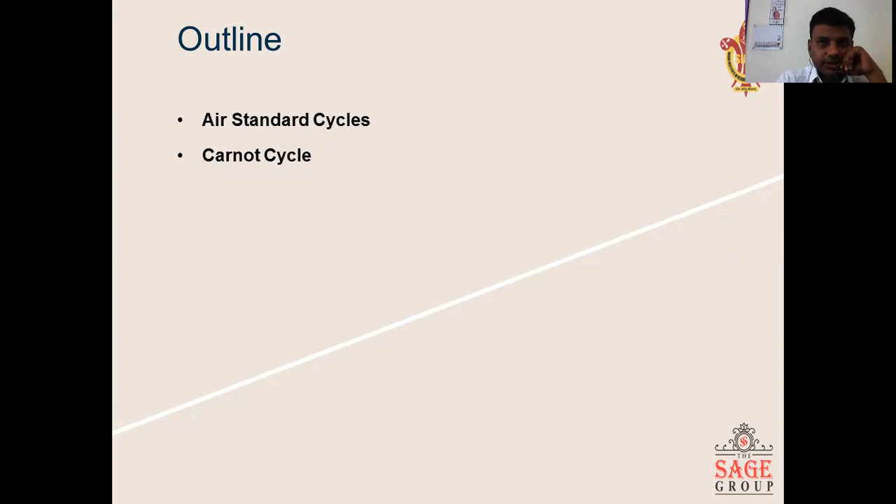So in today's class, we will study about air standard cycle. What are the various assumptions that have been taken while studying air standard cycle? Then we will study one of the most important air standard cycles, that is Carnot cycle. Okay. So let's first start with air standard cycle.

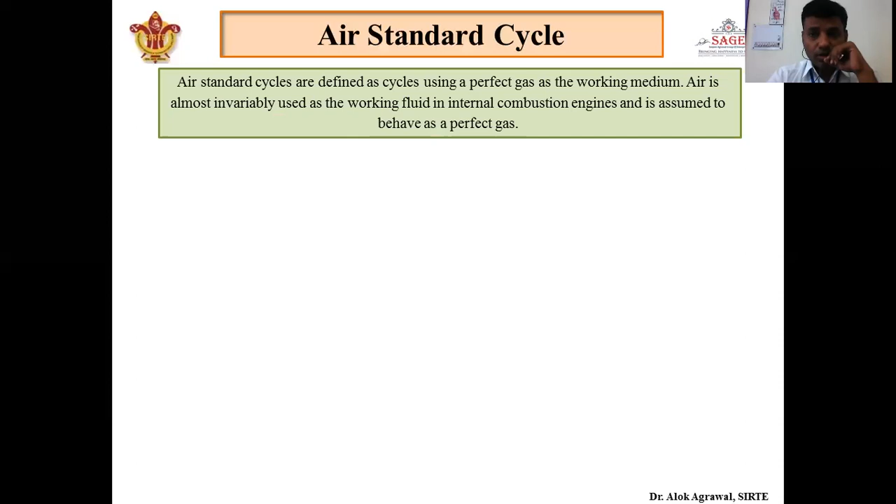So what is called air standard cycle? Air standard cycle is defined as a cycle which can use a perfect gas as a working medium. Okay. So अगर हम perfect gas को our working medium consider कर रहे हैं, then we call it as an air standard cycle. Air is almost invariably used as working fluid in internal combustion engines, because for burning of fuel oxygen is required, and oxygen is present in the air. So we consider that air is a perfect gas, and when we consider air as our working medium, we call it an air standard cycle.

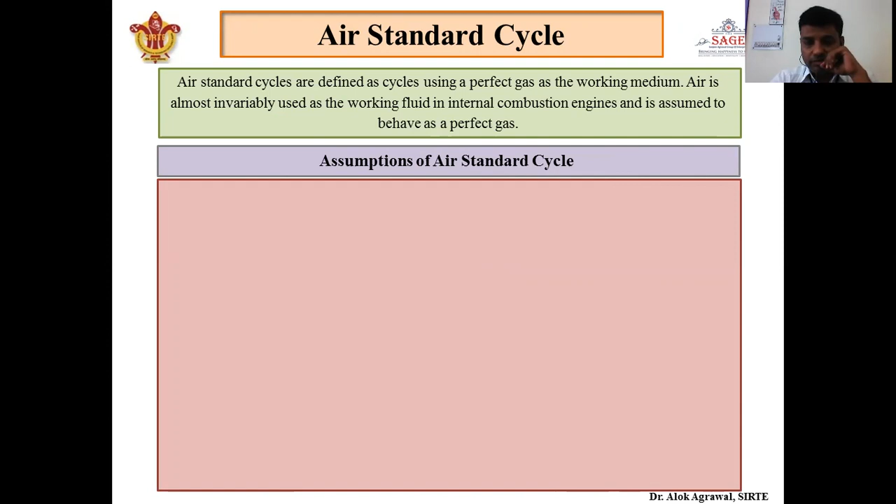Next, apart from that, there are various assumptions that have been taken in air standard cycle. So I am telling about the various assumptions taken. The first, which we have already studied, is that the working medium is assumed to be a perfect gas, and we consider air as our perfect gas, and any perfect gas follows the rule PV = mRT. So this is the first assumption, that the gas has to be a perfect gas and follows the relation PV = mRT.

Next, there is no change of mass of working fluid throughout the process. Means whatever amount of mass is coming inside the system, it will remain constant, and there is no loss of mass due to leakage or anything else. That is assumed, but actually it is not there.

Again, all the processes that constitute a cycle are reversible. Means every process that is occurring in that cycle, we assume to be reversible. None of them can be irreversible. This is the assumption, as we already studied in our thermodynamics, that no cycle is reversible. All cycles are irreversible. All processes are irreversible. Okay. So here we consider that all the processes are reversible.

Next assumption is that working medium has constant specific heat, but in actual, it is not true. Specific heat of gas always increases with temperature. So when fuel burns, temperature increases, and so does the specific heat. But ideally, we have to take the assumption here that there is a constant specific heat of working medium.

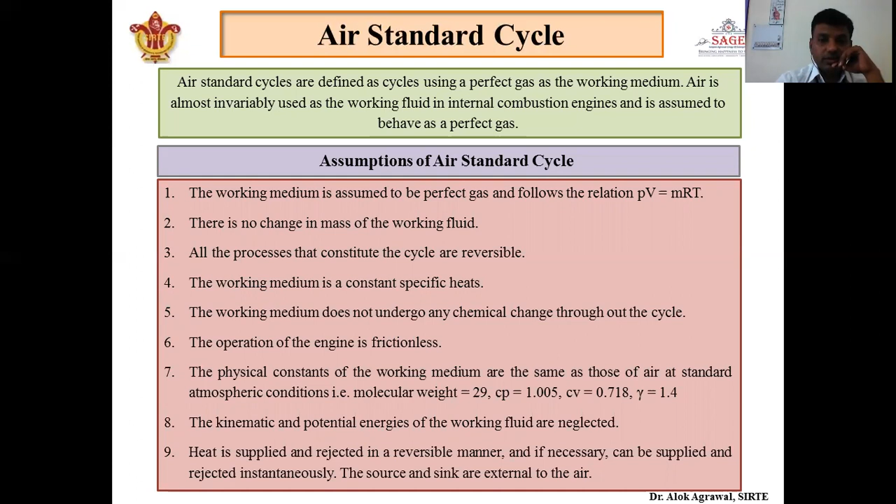So first we are going on Carnot cycle, our first air standard cycle. It is a reversible cycle, because in air standard cycle we assume that all processes should be reversible. So it will be a reversible cycle in which a working medium receives heat at higher temperature and rejects heat at lower temperature. This is a simple heat engine where the Carnot engine takes heat from high temperature and rejects heat at lower temperature. Carnot cycle consists of four processes. Two of them are reversible isothermal processes and two of them are reversible adiabatic processes.

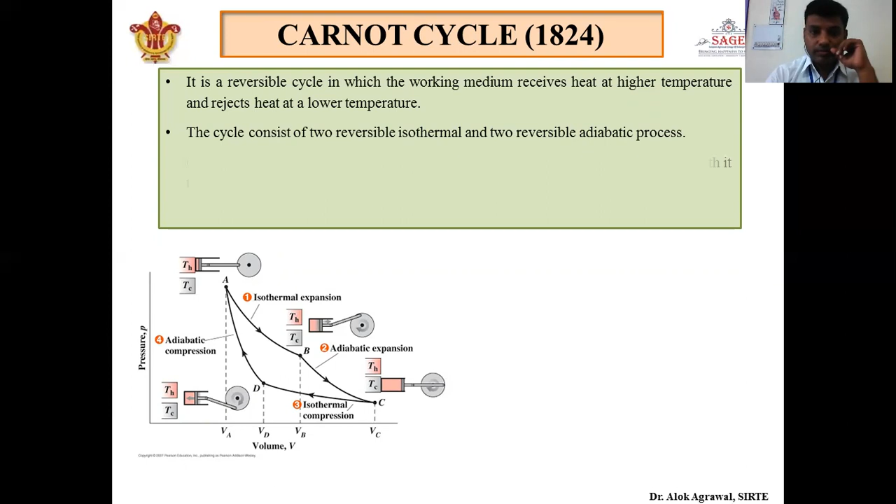Carnot cycle actually is represented as a standard of perfection. It means it is assumed that whatever efficiency we are getting is maximum between the two temperature limits when it works according to the Carnot cycle.

First there will be an isothermal expansion from A to B, then adiabatic expansion, then isothermal compression, then adiabatic compression. So if a heat engine works on this four-process Carnot cycle where the source temperature and sink temperature are fixed, then we assume that it will give maximum efficiency and we can say that it is a perfect cycle, and any other cycle is compared with this cycle to get how near the actual cycle is to the Carnot cycle.

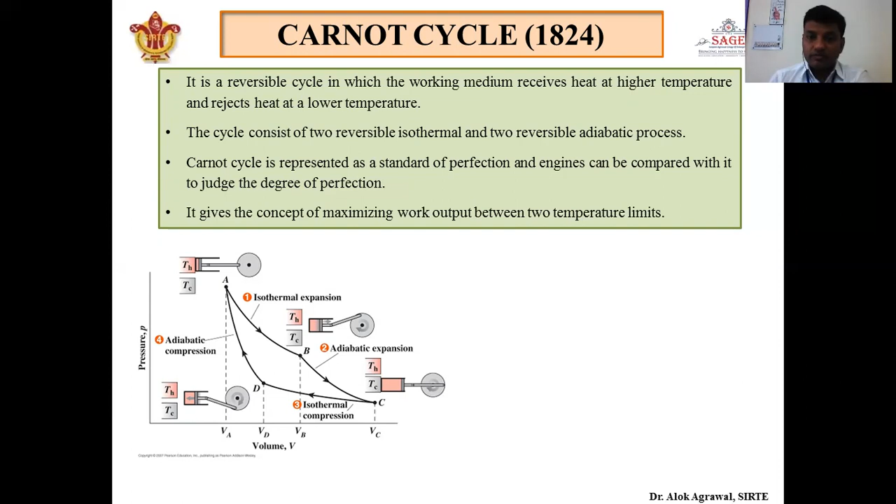Again, it gives the concept of maximizing work output between two temperature limits, as I have already told you. So this is an animated video about the process. Here isothermal expansion is occurring. Here adiabatic expansion, then isothermal compression, then there will be adiabatic compression. It consists of a source and sink. Source is at higher temperature, sink is at lower temperature. Heat is added through the source, heat is rejected in the sink.

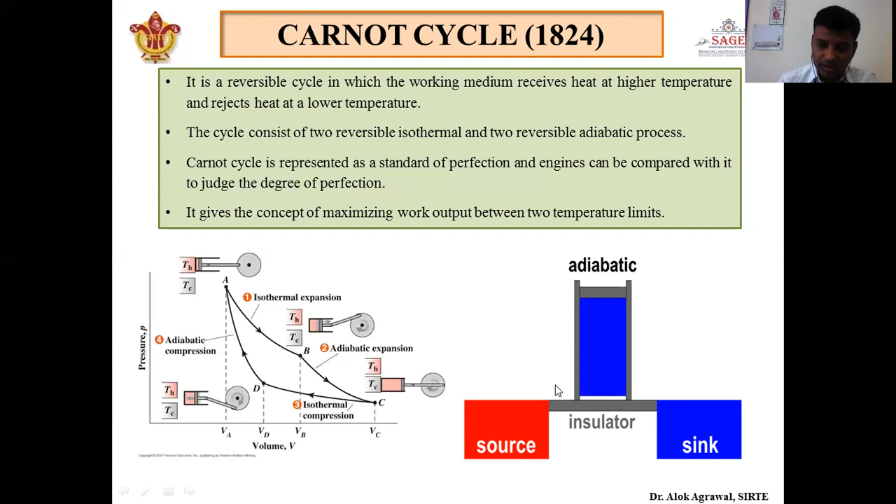Here isothermal expansion, adiabatic expansion, isothermal compression, C to D, and finally adiabatic compression. So here it has been seen that in the first process, isothermal expansion, heat is transferring. In the second process, adiabatic, there is no heat transfer; this is an insulator. Then again heat transfer occurs in isothermal compression, and again it is adiabatic compression where no heat is transferred. So this consists of four processes where the piston moves, expands, and then compresses. Here again is isothermal expansion, adiabatic expansion, then isothermal compression, then adiabatic compression. In this the cycle repeats itself.

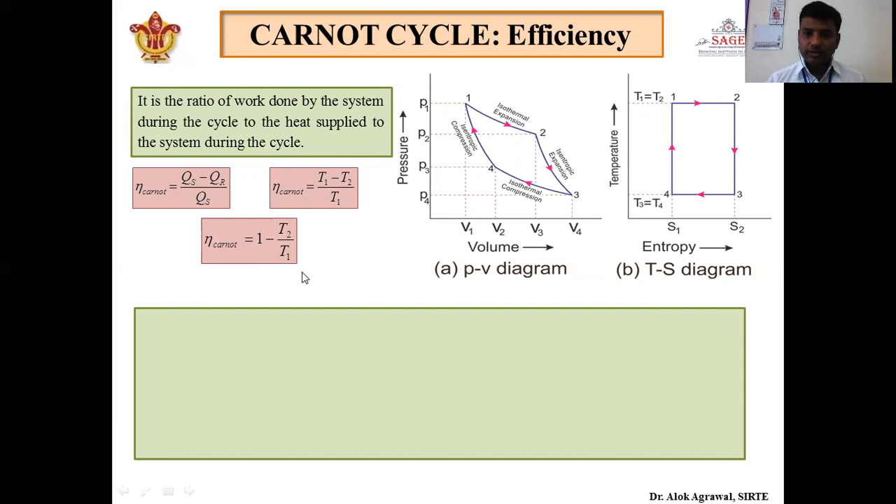In terms of temperature, efficiency of Carnot cycle will be T1 minus T2 upon T1: source temperature minus sink temperature upon source temperature. It can also be written as 1 minus T2 by T1. So this is the efficiency of Carnot cycle. Remember T1 is the temperature of the source and T2 is the temperature of the sink. As we just discussed, any engine works between two temperature limits. High temperature is called source, low temperature is called sink. So how does the efficiency depend upon these two temperatures?

The lower temperature, the sink temperature, is generally atmospheric temperature, because whatever heat is developed inside the engine is rejected to the atmosphere. Hence it is fixed, so we cannot change the value of T2 in this equation. So to increase the efficiency, we have to increase the temperature of the source. As T1 increases, this term reduces because it is in the denominator, and the overall Carnot efficiency increases. So to increase the efficiency of the Carnot cycle, source temperature should be increased.

It is said that between two fixed temperatures, if T1 and T2 are fixed, Carnot cycle will give maximum efficiency compared to any other air standard cycle. There are many air standard cycles, but Carnot cycle is the only cycle which gives maximum efficiency when we fix the temperatures T1 and T2.

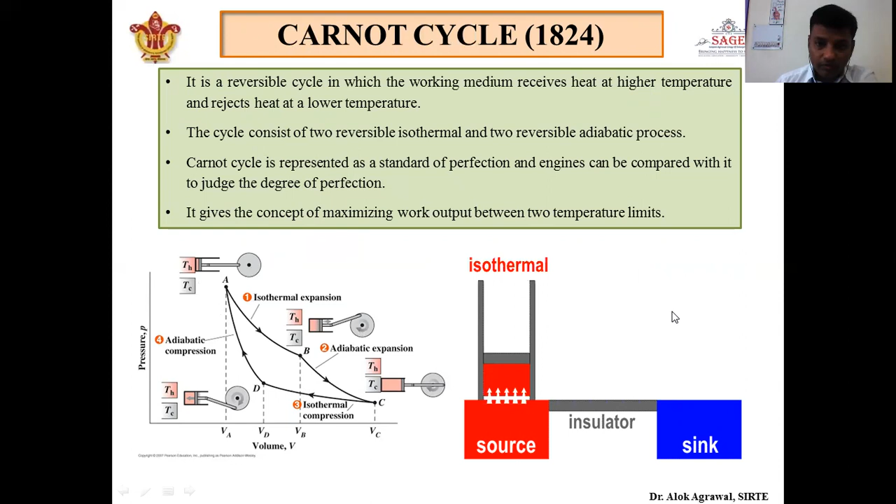The net work output of Carnot cycle is low because there are alternating isothermal and isentropic processes. Also, it is not practically possible, because as we have seen in this diagram, the wall would have to be made isothermal and adiabatic alternately after each process. From A to B it has to be isothermal, then B to C adiabatic, then again isothermal, then again adiabatic. It is very difficult to change the wall of the piston-cylinder arrangement, so the Carnot cycle is practically not possible. So this is all about Carnot cycle. In the next class, we will study other air standard cycles.